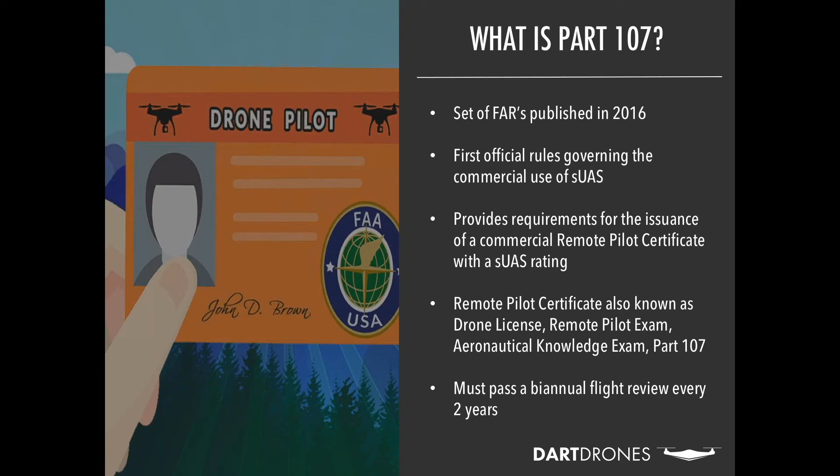There is a requirement, just like for every pilot certificate the FAA issues for all types of aircraft, that to keep the certificate current you must pass a biannual flight review every 2 years. Because the test given to get the remote pilot certificate is only a knowledge test with no practical component, that's what you'll have to do every 2 years—basically a knowledge test of sorts to keep that credential current. The certificate itself doesn't have an expiration date, but unless you keep up with those biannual review requirements, it will lose its currency.

So who needs to take this exam to get the remote pilot certificate? This really only applies to individuals who intend to use an unmanned aircraft for work or some official or commercial purpose. Recreational users—someone who just wants to fly for fun in their backyard or local parks, or take a drone on vacation to get neat videos and photographs for personal use—do not need to take the exam to get a remote pilot certificate.

The FAA basically allows drone operators of small drones to follow the same community-based guidelines that the RC model aircraft community follows. Those are outlined in two areas: Part 101 of the Federal Aviation Regulations refers to model aircraft, and Section 336 of the FAA Modernization and Reform Act, where they lay out those community-based guidelines for recreational users of drones or small unmanned aircraft.

Part 61 pilots—anyone with a current FAA pilot certificate to fly manned aircraft, so a sport pilot, private pilot, or commercial pilot—do not have to take the full Part 107 knowledge test to get a Part 107 remote pilot certificate. Instead, they can do a short online course with a few short questions, get a certificate as a result, and submit that information through the FAA's IACRA website to process the application. They would get the same remote pilot certificate that everyone else would have to take the full knowledge test to get.

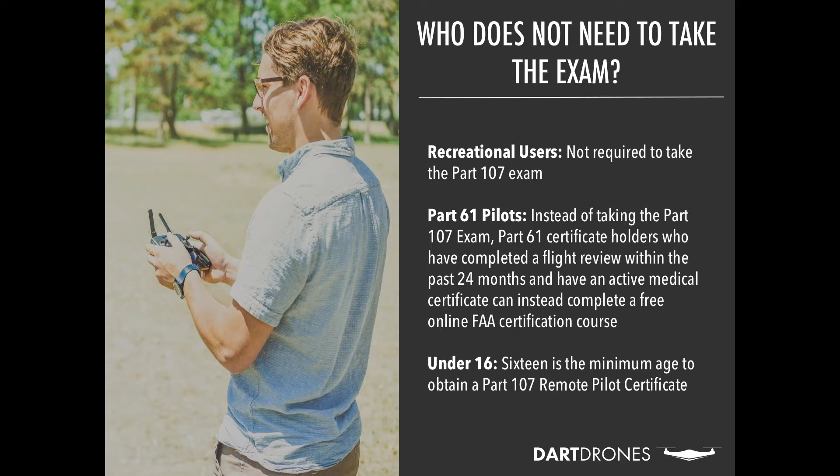And finally, if you're under the age of 16, younger children are not eligible to earn a remote pilot certificate. 16 is the minimum age the FAA requires to issue that certificate. So you wouldn't have to take the exam until you reach that age, but you would only be able to fly drones for fun, not for any commercial purposes.

Moving on—some details about the exam itself. Most of our students, when they tell us their total prep time getting ready to sit for the FAA exam, including time spent with us in an 8-hour in-person course, or studying on their own with our online resources, say it takes between 15 and 20 hours of preparation time, between reviewing the material covered and taking practice tests to ensure success the first time.

It's very important to be successful the first time because it costs $150 every time you take the test, and that is pass or fail. So if you fail, you have to wait 14 days, go back again, and pay another $150.

In order to register for the exam, there are lots of testing centers around the United States. The FAA has almost 700 of them, and you can go to the FAA's website, faa.gov, where they have a search bar at the top.

Just search FAA Knowledge Test Centers, and the first result will be a PDF with a list of those centers broken down by state. The test centers are usually local flight schools, so if you have an airport nearby with a flight school, especially a larger one, it may actually be one of those test centers.

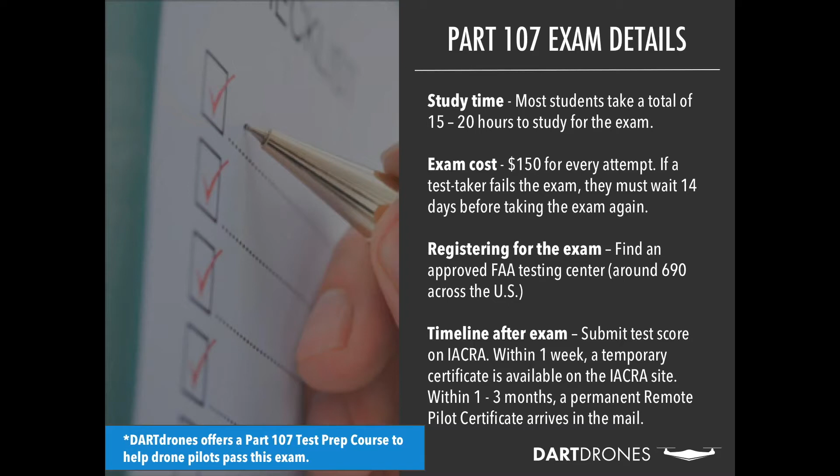Okay, moving on to the next slide. A lot of people ask us, as they're just getting started preparing, knowing they have to take this test—either their companies said they're integrating unmanned aircraft, or maybe it looks like a great new business opportunity—what types of topics will they have to learn about to pass this test?

There are 10 different topics the FAA has identified, listed in the information under Part 107. If you look up that set of federal aviation regulations, it will tell you what those areas are. The first area is the actual regulations themselves—we have to be familiar with them. For any exam the FAA gives, they test you on the actual regulations that define that certificate, so you'll have to know the Part 107 regulations inside and out.

They also spend a lot of time asking questions related to airspace. You'll have to look at FAA aeronautical charts, specifically sectional charts, and determine based on the different classes of airspace depicted where we can fly and where we can't. They'll give you locations, and you'll have to look at those charts and make a determination: can I fly here or not?

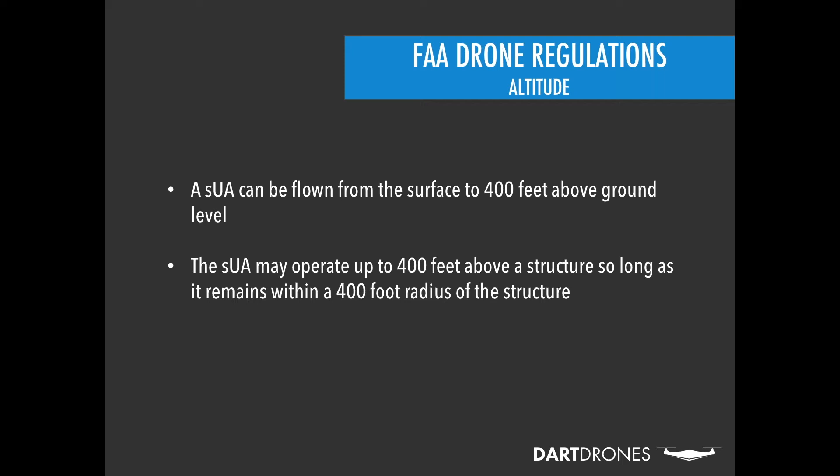Now that's the standard. However, if you are flying within a 400-foot radius of a structure, some sort of man-made structure, you can fly up to 400 feet above that structure's uppermost point, so long as you stay within that radius. So for inspection purposes of large structures, cell phone towers, radio towers, especially more of your FM and AM radio towers and things, you can very easily inspect the entirety of those structures, provided that they're located in our normal uncontrolled airspace, which most of the country would be.

Moving on from altitude, here is our question about airspace. A small unmanned aircraft system pilot must have authorization to operate in Class B, C, D, or the lateral boundaries of a Class E surface area of airspace. So there are 6 classes of airspace within our National Airspace System: A, B, C, D, E, and G.

And basically, if we're flying in B, C, D, or a surface area of Class E, we need to get an authorization to be able to do that. That authorization process is going through some modifications as we speak. It used to be somewhat of a process to get authorizations. It's becoming a bit easier, and actually a lot easier at the moment.

But you do need to go through a special step. You can't just go out and fly if the area that you need to fly is in one of those controlled classes. The good news is that, like I said before, most of the country is in our uncontrolled Class G airspace from the ground up to at least 700 feet above the ground. So usually conducting our flights up to 400 feet is, for a lot of folks, not a problem.

Also, if the agency that is conducting the flight is operating with what's called a certificate of authorization, the terms of their COA will stipulate any applicable airspace restrictions and authorizations. So in this case, the term COA, or certificate of authorization, would refer to a public use certificate of authorization, and that is a specific document.

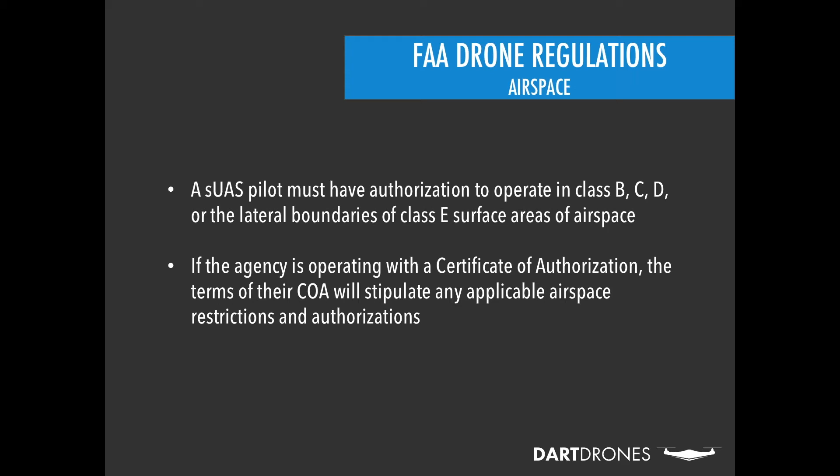All right, moving on to our next section, night operations. The standard Part 107 regulations say that we cannot fly a small unmanned aircraft during nighttime periods unless we petition the FAA for a waiver of our Part 107 regulations to be able to do that. Night flight is actually one of the more common waivers that the FAA does issue, though. It's probably the most common, and it's very easy to get a waiver to be able to operate at night once you get that Part 107 certificate, if that's what your company or your plans are.

Require that operation. Usually those waivers are issued within about 30 days, and the actual process of applying for them is fairly straightforward, although we do recommend that you do your research, do your due diligence. We also provide a service to help folks prepare and submit those requests.

Also, the small unmanned aircraft must be equipped with an anti-collision lighting system for flights at night or during periods of what they call civil twilight. Civil twilight is basically the half hour before sunrise in the morning and the half hour after sunset in the evening. If we have anti-collision lights on our aircraft that make it visible for up to 3 statute miles, then we can fly during those periods without a night waiver.

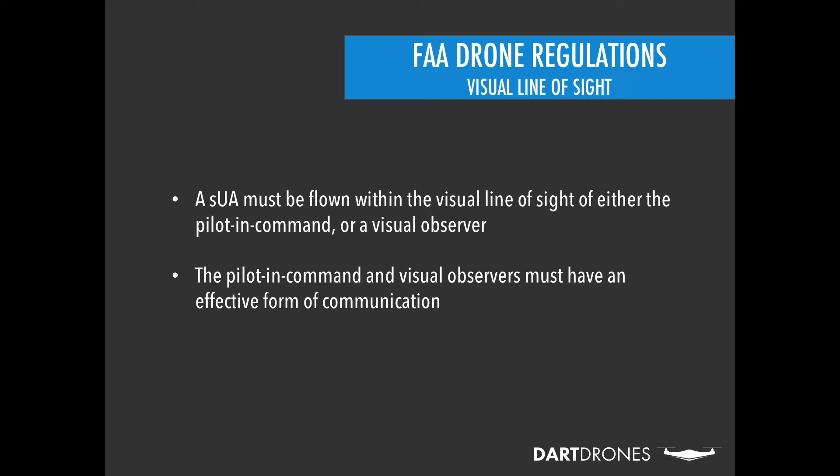Now the use of two-way radios is very common. Some people will use cell phones depending on where they're at and what they're doing, so we can extend our range a little bit and still have an effective form of communication. All right, moving on.

So, flight over people.

So the Part 107 regulations tell us that we cannot fly a small unmanned aircraft directly over a group of people or members of the public unless they are under a covered structure capable of protecting them from a falling small unmanned aircraft, or if they are sitting in a stationary vehicle. If the vehicle is moving on a roadway, then we are not allowed to fly over those vehicles. The FAA does not specify a standoff distance as far as how far away from these members of the public or moving vehicles on roadway the aircraft has to remain.

So it's not super restrictive. Usually we can do things like plan out our flight paths very specifically, use our payloads and our cameras to monitor for people or vehicles that may be crossing or may have the potential of crossing underneath us, and avoid those situations. So not too bad.

But if we do need to hover directly over large public gatherings, things like that, then we would need to get a waiver to be able to do that. And again, agencies that have an approved certificate of authorization, one of those public use certificates of authorizations, they may receive authorization to fly over members of the public, either for specific purposes if they're responding to an emergency situation, or as the result of incidental flight over people. So basically, just on the nature of where they have to operate and what they need to do, perhaps people may cross underneath them unknowingly that there's an aircraft there. They could have the FAA's clearance for that to take place with those public use COAs.

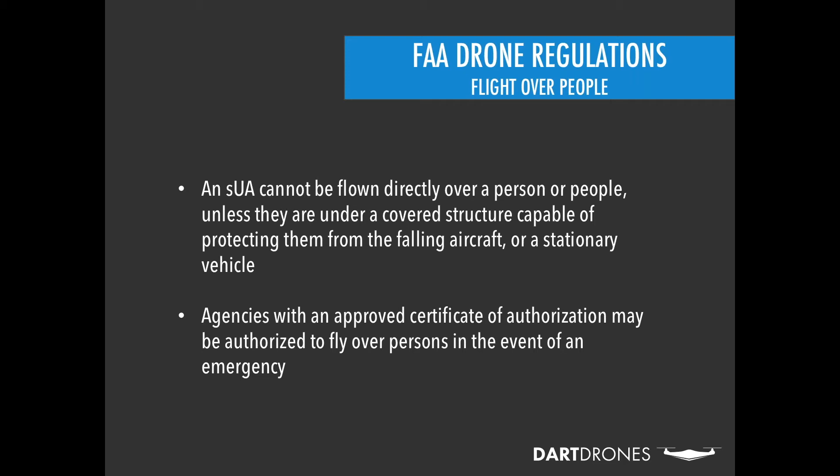All right, moving on. Weather requirements. So I stated one of the reasons that we have to learn quite a bit about weather conditions is...

...that the FAA does expect us to be able to abide by certain weather minimums to be able to fly under the Part 107 regulations. First off, we always have to have reported visibility of at least 3 statute miles from where our flight location is located to be able to fly. So basically, the clouds have to be high enough and the rain has to be either no rain or light enough that we can see up to 3 miles in any given direction. And that is something that they report on those aviation weather reports.

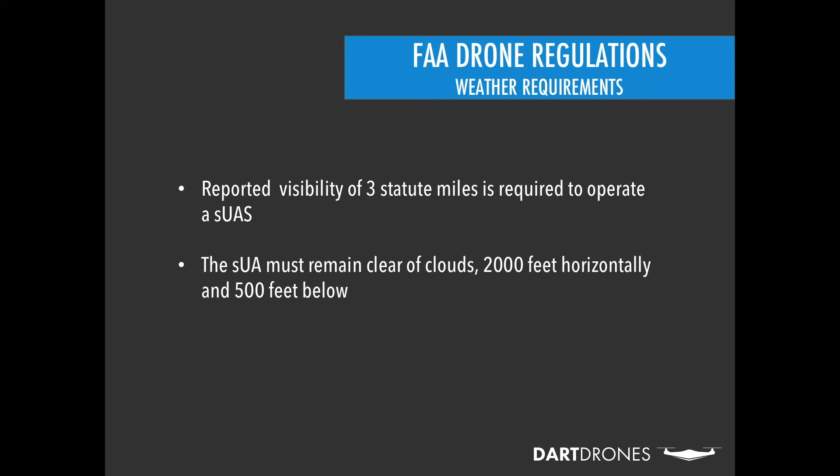Also, we have to make sure that our small unmanned aircraft remains clear of clouds. Specifically, we have to be 2,000 feet horizontal from any low-lying clouds that might be in an area, or 500 feet below any cloud that may be right overhead of our flight area. And again, they will include cloud height information in those aviation weather reports, so another reason why we have to learn to read those.

Okay, moving on. Operating from a moving vehicle. So we are not allowed to fly a small unmanned aircraft from any other moving aircraft. That really doesn't come up all that often, but you can't sit in a hot air balloon or a helicopter and try and fly the drone by looking out, basically.

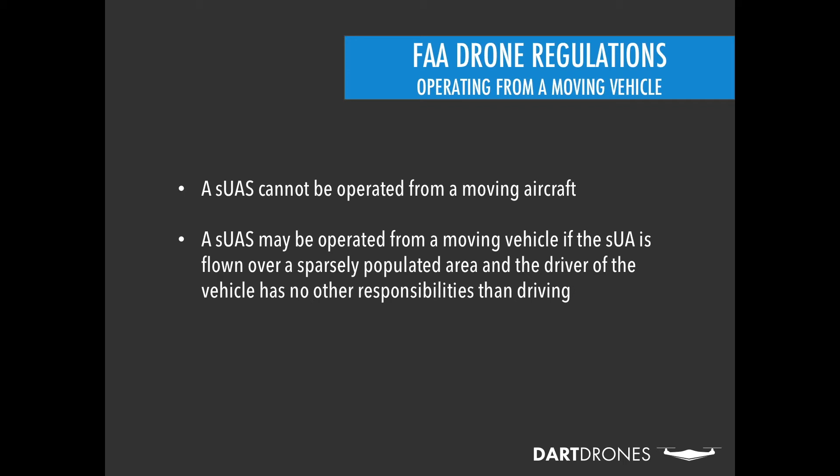And they also tell us that the small unmanned aircraft may be operated from a moving vehicle, but only if the small unmanned aircraft is flown over a sparsely populated area and the driver of the vehicle has no other responsibilities other than driving, and you are also not transporting anyone else's property for compensation or hire. So at this point, Part 107 would not allow for drone deliveries in that regard if you're transporting someone else's property. Moving vehicle would apply to either a land-based moving vehicle like a car, truck, something like that, or a boat, a vessel on the water.

Okay, moving on. Inspections for safe operations. In terms of maintenance requirements right now, the FAA really doesn't go into a whole lot of specifics as far as requirements on certain annual inspection processes that need to be done, or different types of maintenance requirements for small unmanned aircraft. Really that's because by the time the FAA started to put these plans for integration together and really started paying attention to small unmanned aircraft and what folks had already been creating and starting to use, there was already such a wide variety of systems out there that they really haven't been able to get a full grasp on all that.

Also, given the relative simplicity of the small unmanned aircraft systems and most of the small systems that folks are using today, really the FAA doesn't feel like it's something that they have to get in there and do a whole lot with at this level.

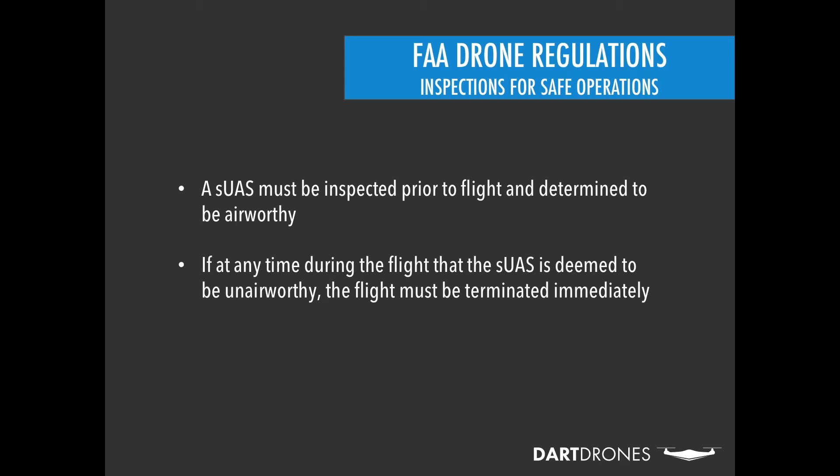It is the responsibility of the pilot in command to always make sure of two things: that you are inspecting the aircraft prior to flight to make sure it is in an airworthy condition, with all components functioning properly, and that if at any point during the flight you have reason to believe the small unmanned aircraft is no longer airworthy—such as a warning message on the flight display or abnormal flight behavior—it is your responsibility to terminate that flight and rectify the situation before continuing.

FAA regulation waivers: as we mentioned when we went through the regulations, there are certain elements that can be waived, where an applicant can request a waiver to do things outside of our standard Part 107 regulatory scope.

If you request one of those waivers, it is an online process. You have to submit a narrative giving a detailed explanation of how you will meet what the FAA calls waiver safety guidelines. For each waiver type, there's a list of safety guidelines you have to show how you're going to fulfill, and you have to be comprehensive. If you show that to the FAA's satisfaction, they will issue you that waiver.

Some waivers are issued relatively quickly. Night flight, for example, has a relatively straightforward waiver process and common narrative, and usually you'll receive that waiver in about 30 days. Others may take up to 90 days for approval, and some are even taking longer than that—sometimes 90 days is just what it takes for them to get to it and look at it.

But if it's a complex waiver, or one that's a bit more risky in terms of the actual operation being conducted, the FAA is going to spend more time, and there are going to be more and harder waiver safety guidelines to meet. So it takes due diligence to meet their expectations to their satisfaction.

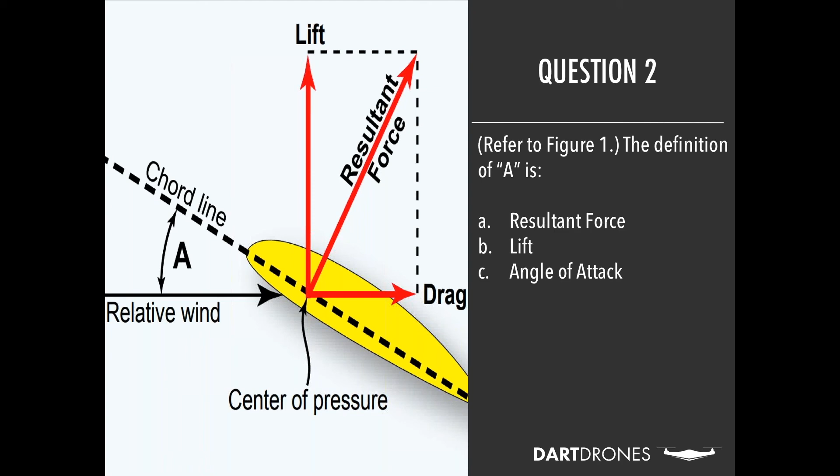Looking at our next question, refer to figure 1. This one's asking for the definition of an angle. This is some basic aeronautical information, and the letter A refers to the angle between the chord line, or the midline of the airfoil or wing, and the oncoming relative wind, or the air flowing over that airfoil. The definition of that angle is what we call the angle of attack.

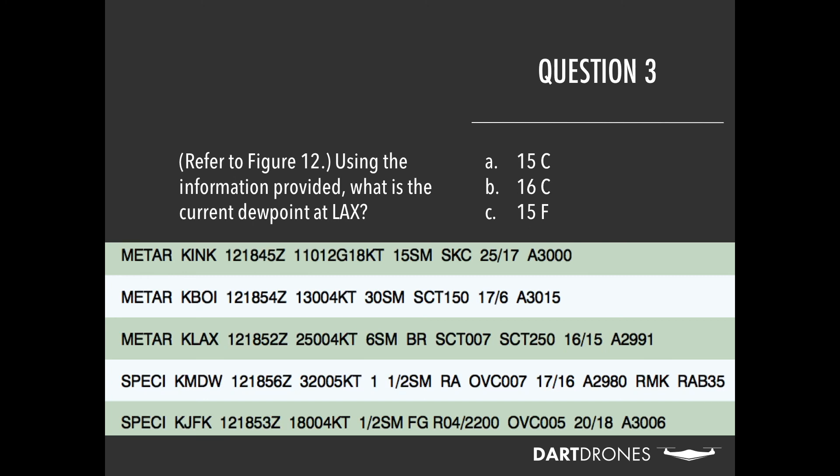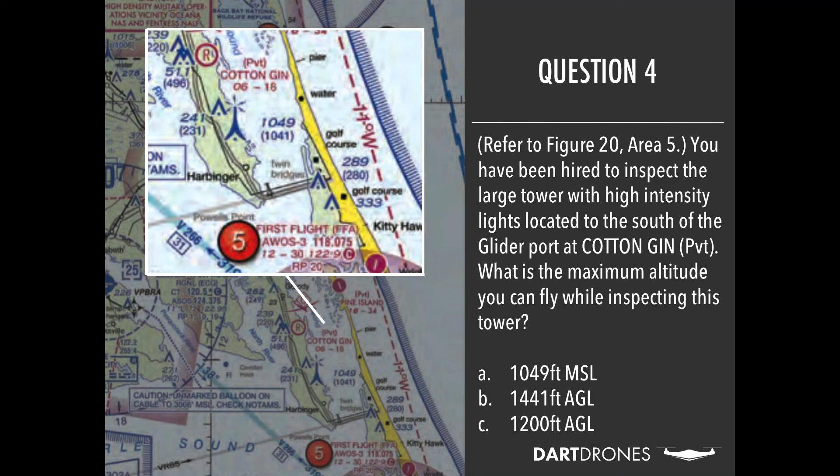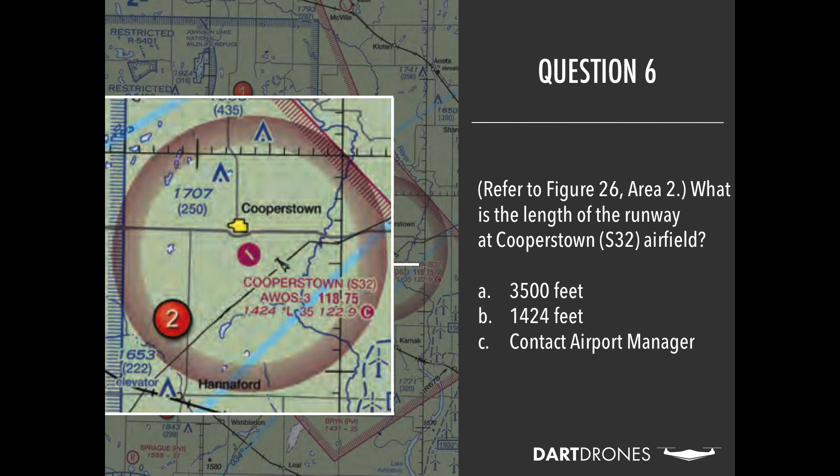Some study tips: really understand the aviation terms, sectional charts, and weather—those are huge sections, and a lot of our students say they're the hardest. Having a good grasp on those helps. Also, utilizing practice tests can be very helpful, and a good tip is to not just memorize questions, since they might word it differently. Also, understand symbols and figures, and know which materials will be provided during the FAA exam.